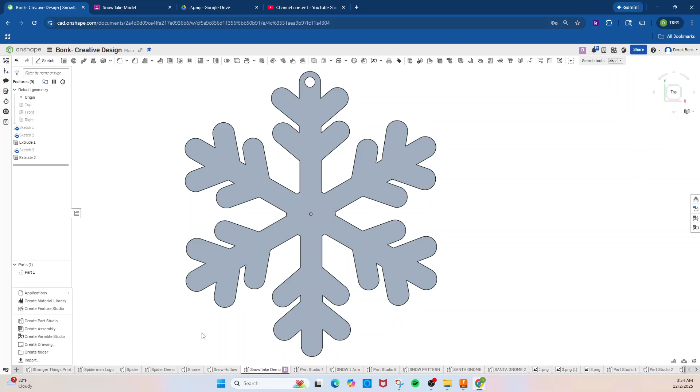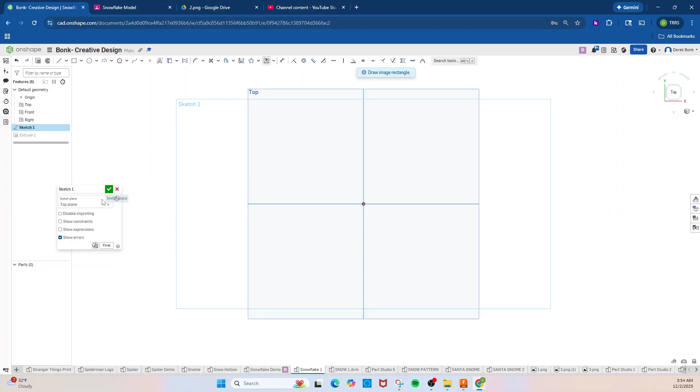Alright, just back here you have to have the sketch started on top plane. In this case I'm using insert image, and here's my imported picture. I'm going to drag this out. The size, you can make it a specific size if you wish.

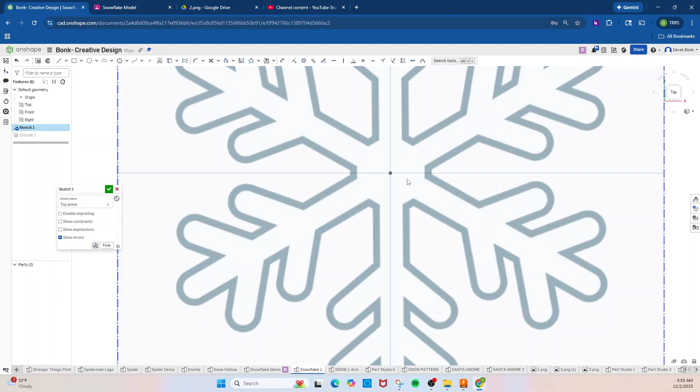I'm not demanding that. You can make it maybe 150 millimeters, but more so, you just make sure you have the escape key selected there, so you click the escape key so you have the white arrow. And just do your best to center it. That's more important, that you have it centered left to right up here. You don't really need to have it centered the other way around.

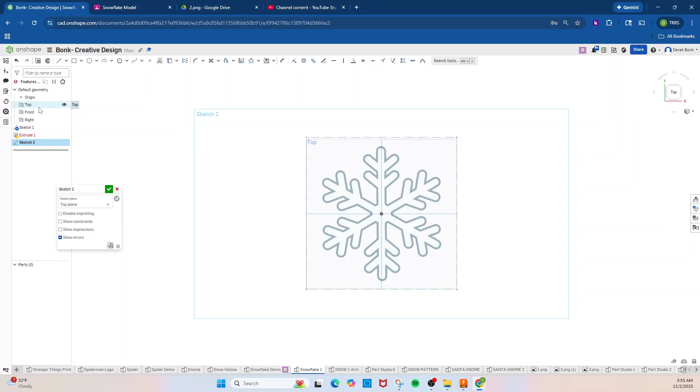You just click sketch one more time, and you're clicking on the top. Sometimes it's tricky to see what's going on. You could always click sketch and then click top here, and it's going to do the same thing. Remember, the point is to be able to hide sketch one that you're working on.

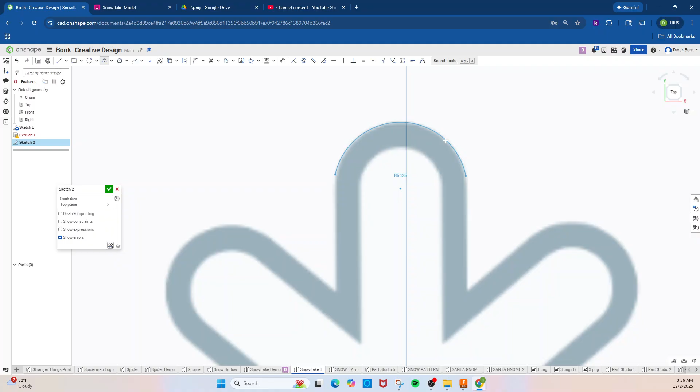And here we go with the... this center line isn't going to affect anything. The easiest way, in my opinion, for this sketch to happen is to use 3-point arcs, where you click 2 points across an arc like so and bend it into position with a 3rd click.

Anytime you do this, it's not going to be perfect unless you get really lucky. It does happen, but chances are what you do is go around after you do these connections and smooth it out with a tangent constraint. You can also hit the T on the keyboard, and that'll activate the tangent constraint, and it'll smooth out and perfect the transition from arc to straight line in every case. You just have to go through and do it.

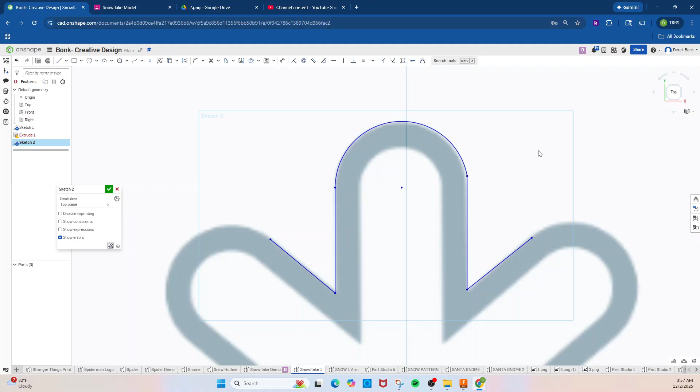So here we go. Hitting escape as needed, finish the tools. You can hit the A on the keyboard for a 3-point arc. Learning to use the shortcuts to turn on these tools is incredibly helpful. That's the L for the line on the keyboard.

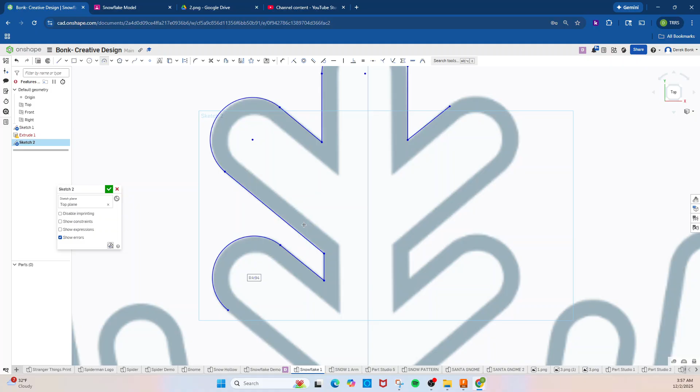Because to draw, you're always using a combination of tools. So I can just hit A, and it's going to hop to the arc instead of having to go back up and click it. And an arc. L for line.

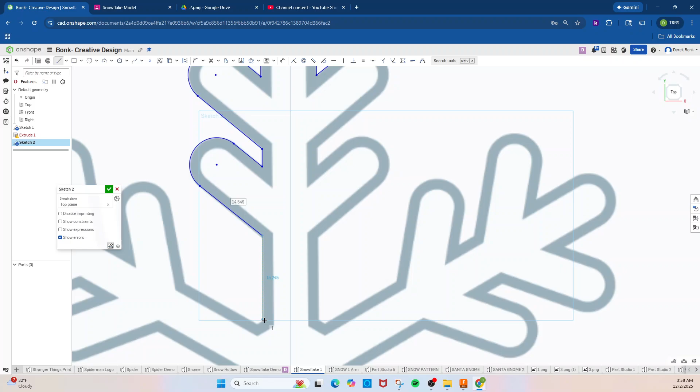Hit escape if you make a mistake. You can hit the back arrow here, and you can see how much easier it is to just use a letter on the keyboard if you're already keeping your hand over there for the escape key, which you need to, since you're always going to end up doing that a bunch. You can just hit the L button instead of going back up and hunting.

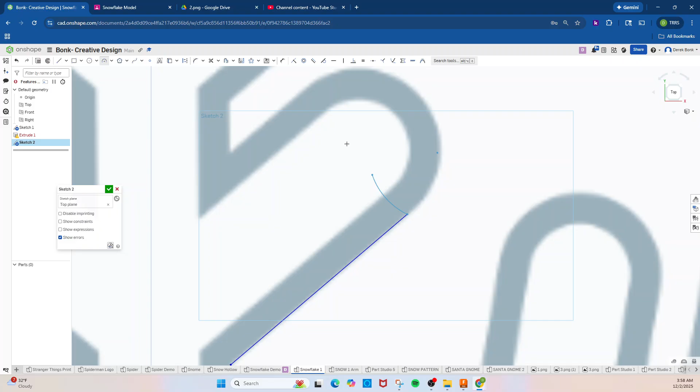Turn the line back on. The escape key - you can go up here and use the arc, or you can hit the A on the keyboard. The A on the keyboard makes life way easier. And if it's not perfect, something like this, when you fix it with the tangent and it smooths, you could always hit the escape key and get your selection arrow and just pull it.

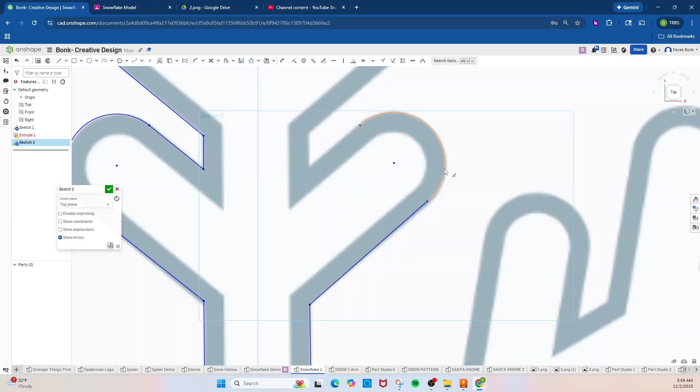Depending on how you need to move it, change the arc, change the length of this line. I had to grab the endpoint of that line. Hit the L on the keyboard, like so, escape, hit the A for the arc tool.

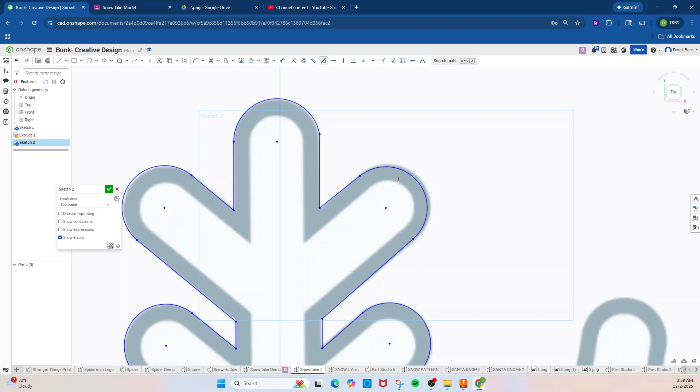You can see it'll show you a tangent snap there. It went tangent here, but it didn't over there. And you always go back and just correct it if need be. Fix that one. See, it shows you the buttons pressed on those tools when they're being used.

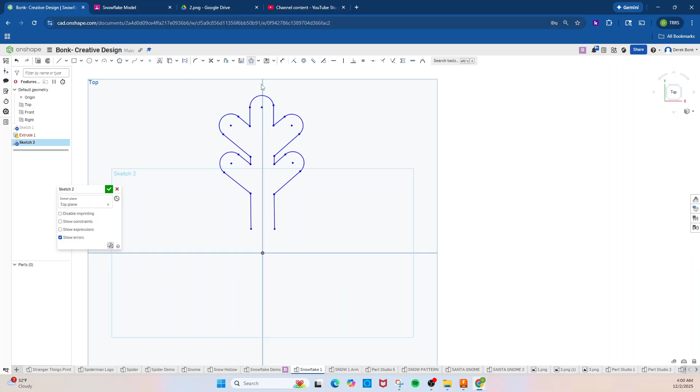But anyway, for the sake of demonstration, I'm not going to go back and clean it up anymore, but this right here, oops, missed. These menus will hold on to your last option, so you're going to see whatever the default first option is, and you're going to have to down arrow, circular pattern, drag over what you want.

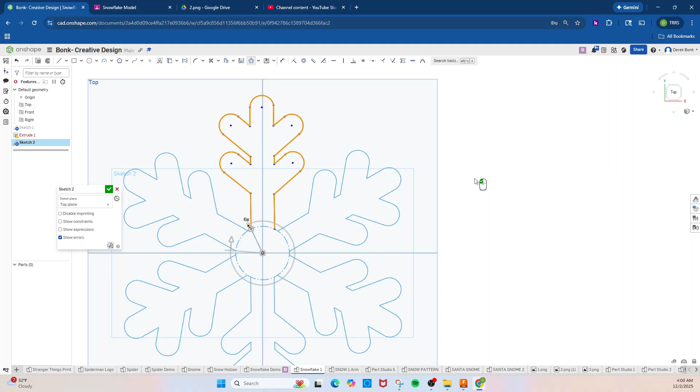And if it's placed all the right way, it's easily going to do that for you. You can just double click, change this to 6, and it's going to show you on the mouse icon next to your arrow there that there's a green check mark, telling you to click that button on the mouse to finalize it. And the last step is to put little connection lines.

Here, because you're just completing a segment, you don't have to go back and turn on the line tool again. The software does a good job with making tools easily accessible.

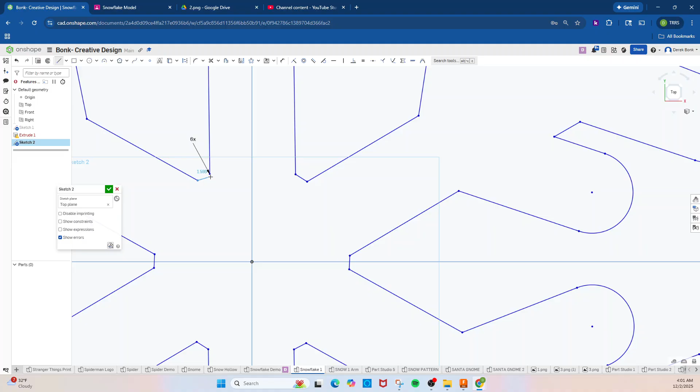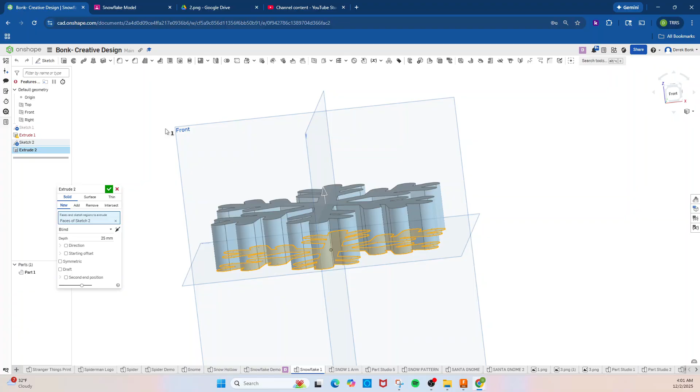And you will notice if you complete the outline of an object, you're going to get that new color depending on which program you're working in, and that is critical. Otherwise there's a mistake. Right click, tumble, drag. You can just sculpt this. It doesn't need to be any specific measurement, or you can type in a number if you wish.

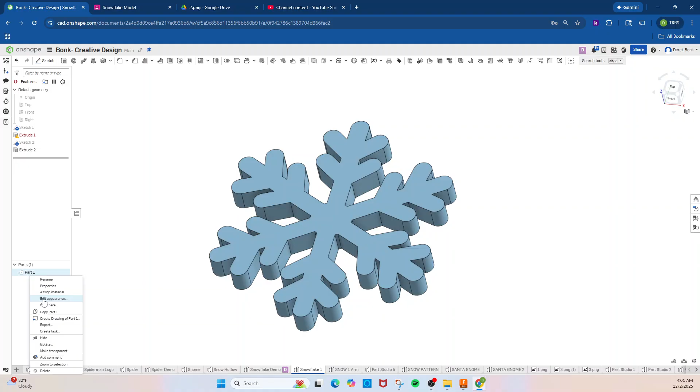Here I want you to know how to turn the visibility of these things off so you can capture a photo. You can also right click on the part over here, edit the appearance, and either select a color this way or go into your mixer, which you can slide through the rainbow colors and pick shades however you like. You could also get really specific by putting in hex color codes or RGB numbers if you want a color match.

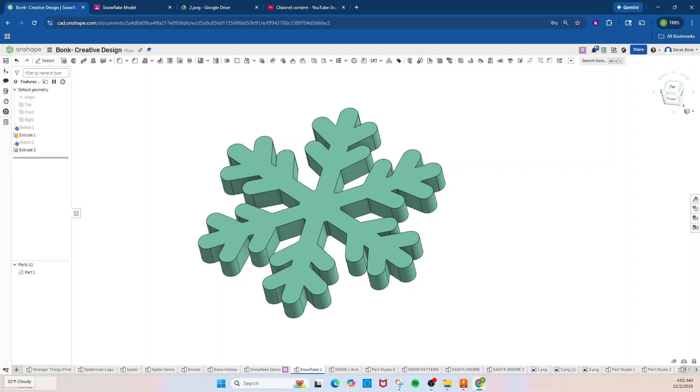And that is how you use circular patterns. See you soon.